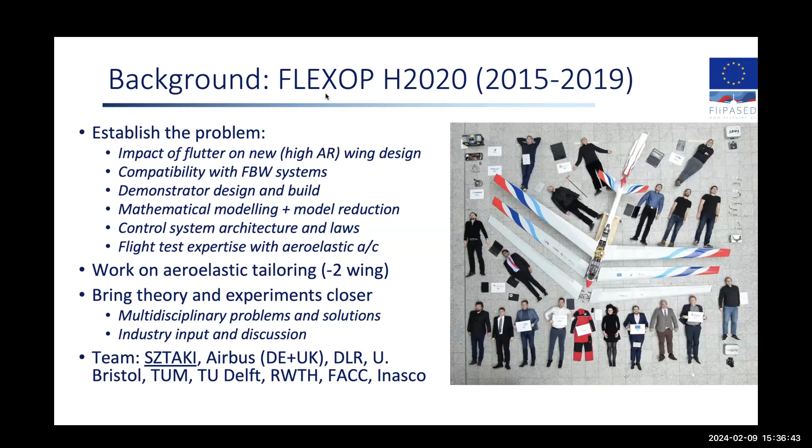So just a little background on our aircraft. We on purposely put lots of sensors on the aircraft. So what you see here is that in the wing, you have multiple inertial measurement units measuring both the acceleration and the angular rates inside the wing.

So to be able to reconstruct the flexible behavior of the wing, we have lots and lots of actuators to be able to control the motion of the wing.

And we developed our own flight control architecture to be able to react very fast, because we know that flutter is a kind of very fast dynamic phenomena. So you would not be able to allow space to have more and more delay in your loop.

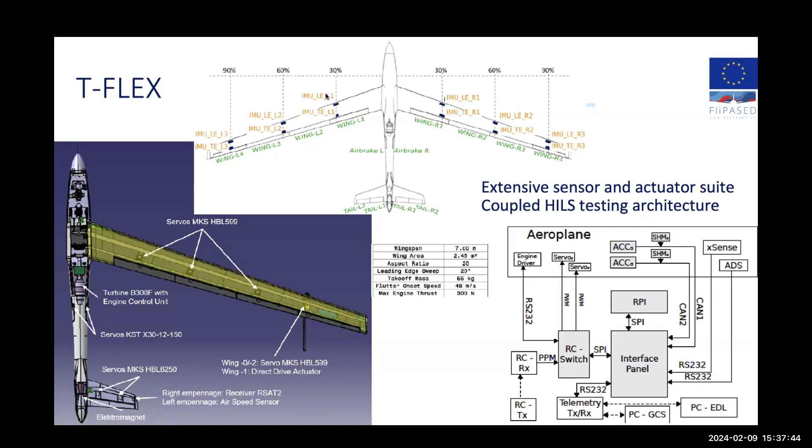And coupled with that, we also developed the hardware in the loop infrastructure, which came very handy during the time of COVID, so that we could test algorithms and flight control computer parts in our lab instead of going to Munich, where the aircraft was sitting.

So we were very lucky that we had a follow-up project from 2019, which was also led by me, and mostly the proposal was also done by me.

The basic idea was that we know flutter is a limiting phenomena if you have an aircraft, but what happens if you put controls into your multidisciplinary design optimization and open up some design freedom in your aircraft optimization space to account for active control technology, and you can, for example, delay flutter by a control law,

which can lead to 7 or 8% reduction in fuel consumption according to our initial calculations. So what we were saying in this follow-up project is, let's carry over the demonstrator, and we wanted to validate both the control technologies and the aeroservoelastic modeling framework.

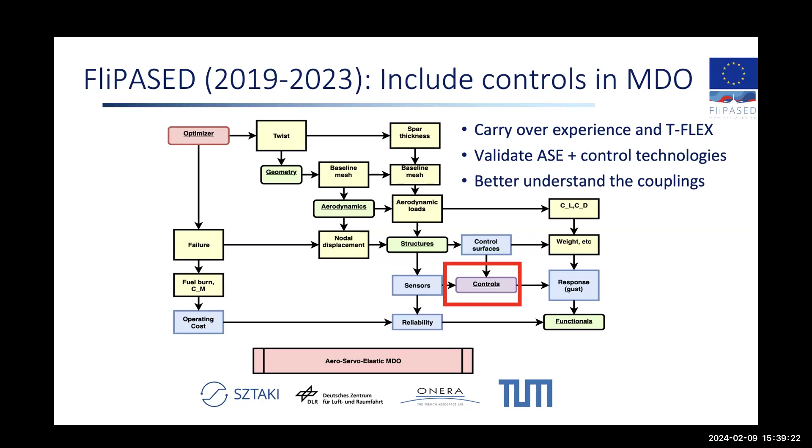And what we said is, let's better understand how control and aircraft design couples. So what are the main challenges if you have a flexible aircraft? You have multiple phenomena happening at different frequencies.

First you have the zero frequency, the trim. You have to optimize for trim to be able to get the best fuel consumption. Then you have the baseline flight control laws, which are kind of low frequency. Then you have different dynamic loads by gust and by turbulence. And then the highest frequency phenomena is flutter.

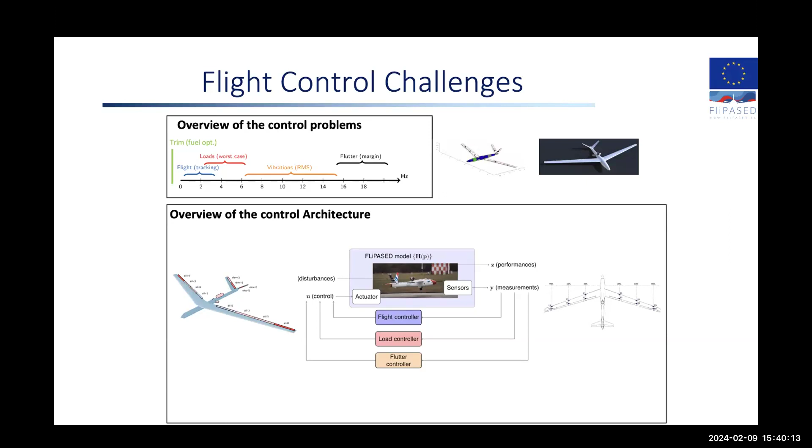So we have to do nested feedback loops. They would interact with each other. And you really have to develop a systematic framework, because if you design one feedback loop without taking care of the other, then you would have some troubles.

So we had lots and lots of things in the project, but I'm going to focus on the flutter control part, because that's the highest frequency, the most challenging thing.

What we were doing in the flutter control problem, we initially decided that we will have two kinds of competing designs, one of them by DLR, the other one by Sztaki. Both of them would be based on the high fidelity model developed by DLR. And then one approach, done by DLR, is a so-called H2 optimal blending.

So you would take all your sensors and try to blend them in a way that they are sensitive to the flutter mode. You generate one single output, which is representative of your mode, what you want to control and what is unstable in our setting. And then you would just design a very simple dynamic controller, so this blending is actually a static thing.

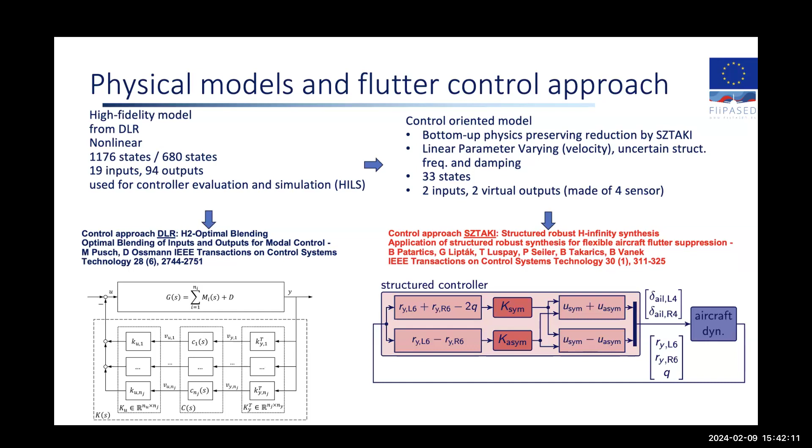The Sztaki approach, which we developed together with Pete, was based on a structured controller synthesis, which was kind of the need of industry, that they don't want to have a very large, very complex control gain or very complex dynamics. So we said let's restrict ourselves to have a very simple dynamics, but we want to do an H-infinity optimization to be able to optimize for, let's say, disturbance rejection or sensitivity.

So the first thing you have to deal with in these aeroservoelastic problems is you have a model coming from, let's say, another partner, DLR, where you have very, very high state order and no control design method, or not no, but all the control design methods would have a very hard time working on them.

So we developed first a model reduction technique or framework, in which one of the most important things was we wanted to retain the physical insight of our system. We developed the model reduction technique where you still retain the physical meaning of the states, and that can be done by a subsystem approach. So we individually reduce the aerodynamics and the structural dynamics, and then put them together afterwards to assemble a model which you can still analyze certain engineering phenomena.

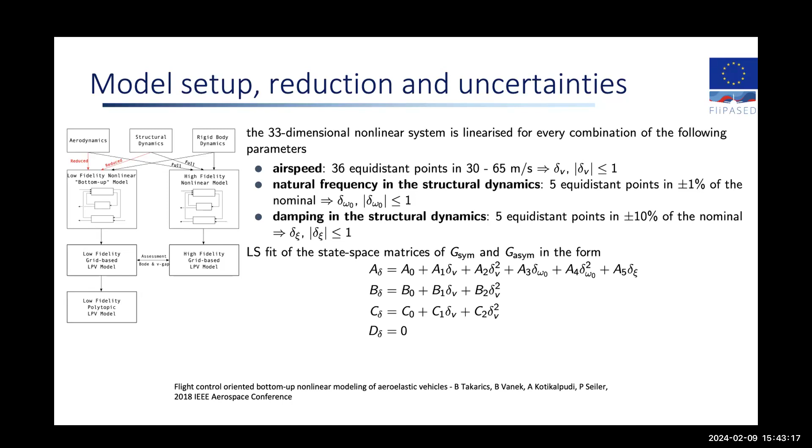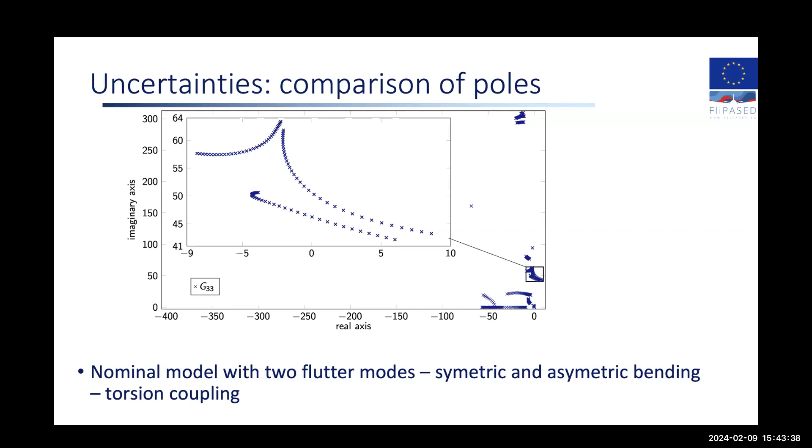After that, this physical approach also allows you to introduce uncertainties in your plant. So we said we don't want to have a design for just a nominal plant, but we wanted to represent physical uncertainties both in the modal frequencies and modal dampings of our aircraft dynamics. So with the subsystem approach, after reduction, we were able to introduce parametric uncertainty in the model. And since we wanted a simple control design, we decoupled the lateral and longitudinal dynamics to be able to have two flutter modes: one is symmetric flutter, the other one is asymmetric flutter.

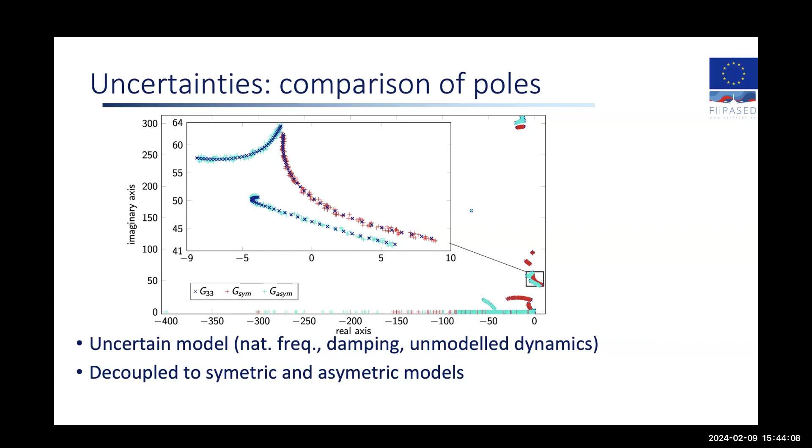Then we went to design a controller. It was natural from the beginning that we would use the outermost ailerons. There was no question that the wingtip actuators would have the highest control authority on the wing bending and torsion motion, but we had to come up with the best sensor selection.

As I said, DLR was doing a full all-sensor blending. We wanted to do something which is more explainable. So we said, let's pick certain sensors and then blend them manually and do a similar control design, like a SISO control design, but put some engineering thought into what is the best way of picking these sensors. Normally, the state of practice in aircraft industry for measuring vibration is to use accelerometers.

What is actually interesting is that accelerometers would be picking up wing bending motion, but our flutter is mostly torsion dominated. So we went with an unconventional selection: we wanted to have the torsional rate sensors in our control loop. For the symmetric motion, we blended the left and the right and subtracted the center body motion, and for the asymmetric, we just took the difference of the two.

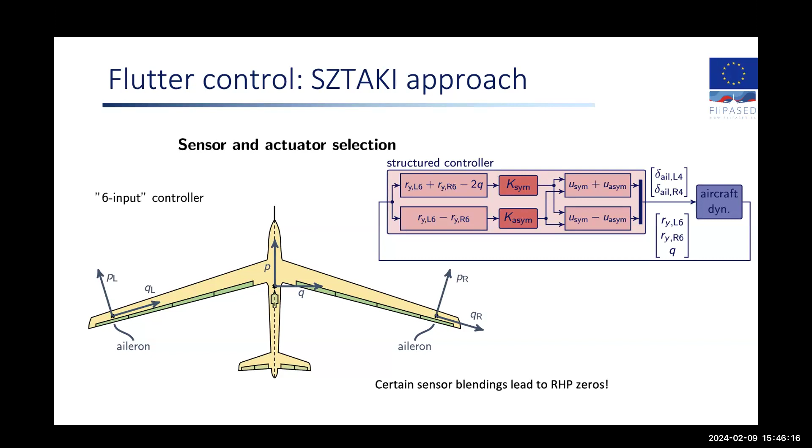But just to make sure that during flight test we have a backup solution which is maybe more robust, we also did a control design where we used additional sensors, not just the torsion, but the bending rate. That was just for our own sake, to make sure that if something doesn't work in flight test, we would have a fallback option.

So then, if you massage your system like I explained, you end up with a design model, which in this case is a SISO model. But you can see that there's some pretty nasty, unstable behavior at the flutter frequency, and there's lots of variation of the plant as you change speed from below flutter speed to over flutter speed.

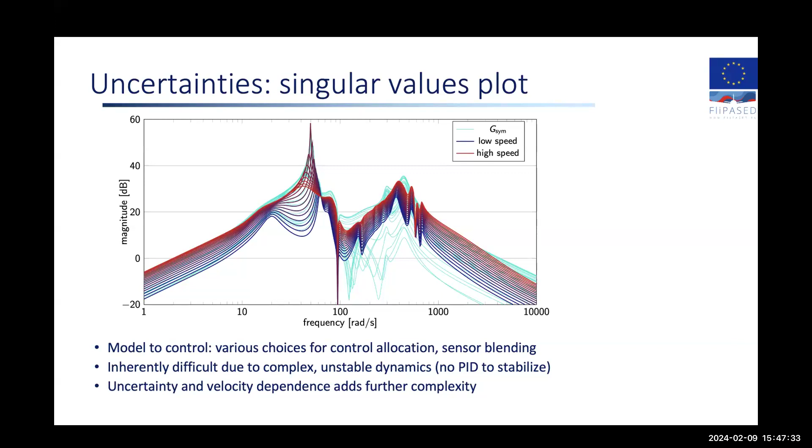We didn't prove it, but it was even kind of obvious that a PID controller would not be able to stabilize these plants. These are such complex dynamics that simple controllers would not be able to provide stability. And of course, we still had the uncertainty in these plants, so we wanted to design a controller which is robust for a parameter variation of damping and also for a range of velocities.

So, as we said, we picked our favorite control design methodology, H-infinity, but not like a full H-infinity solution. For the symmetric modes, we have a 4-states controller, and for the asymmetric, we have just a 2-states controller. That was kind of an iterative process to come up with these state numbers, the lowest possible with which we can have meaningful results.

And the control setup, like the weighted interconnection, looked like this. So we had only sensitivity minimization, and we penalize only the actuator input. We also had a prescribed filter to match the bandwidth of the actuator. So this is your only free parameter, and you prescribe the structure, and of course you have a delay in your loop.

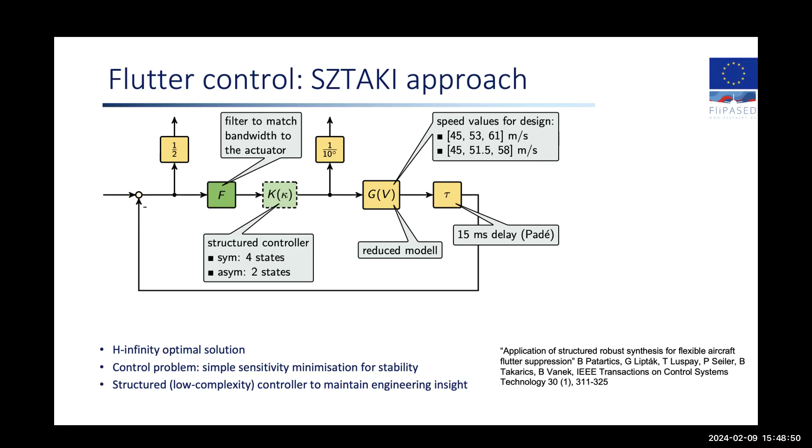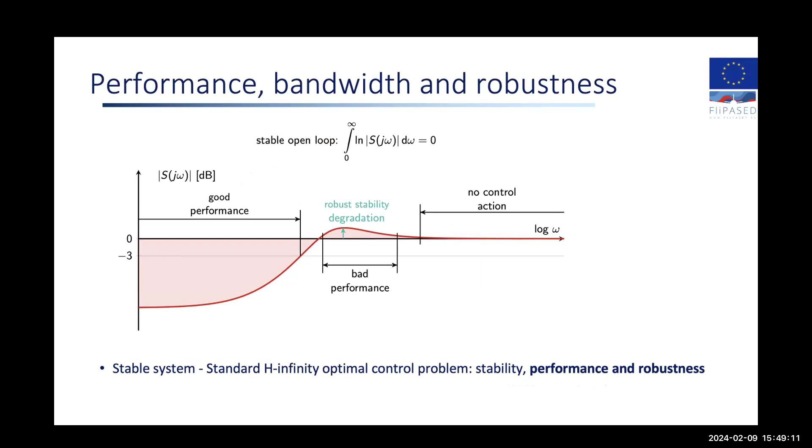What we wanted is a controller which stabilizes a range of velocities with one single controller. Of course, if you have a stable system, you could have performance, and it's kind of the easiest problem to have. You can have robustness as well. You have a certain frequency range where you have degradation, and then at high frequencies you usually have no control action.

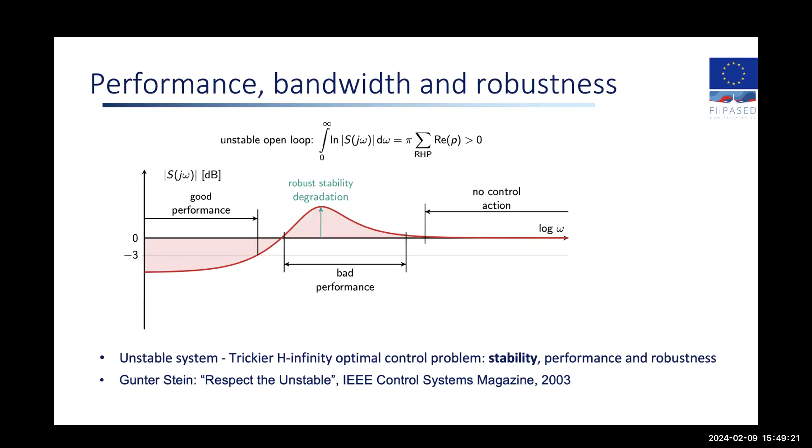Of course, if you have an unstable system, then you have even more difficulties. And if you have right half plane zeros as well, then you might not be able to do anything with performance—you just want stability. So we set up our problem as a sensitivity minimization, where we didn't want to achieve any kind of performance, just to make sure the plant is stable, because in certain combinations we had right half plane zeros in our design plant.

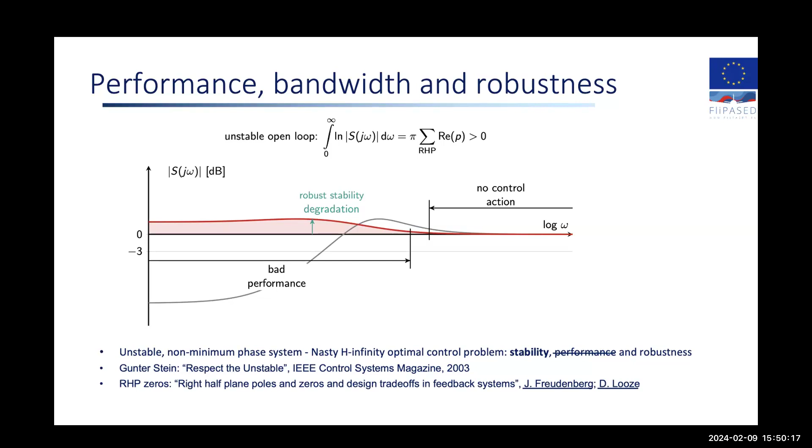It was kind of a long process to find the best trade-off between sensor selection and achievable performance. For example, the accelerometers would not give you good results because they had a direct feed-through, and that would lead to further complications in the control design.

So then we had the plant from DLR, we reduced it, we designed a controller for it, and then we started analyzing, first of course in simulation—how the whole trajectories look like.

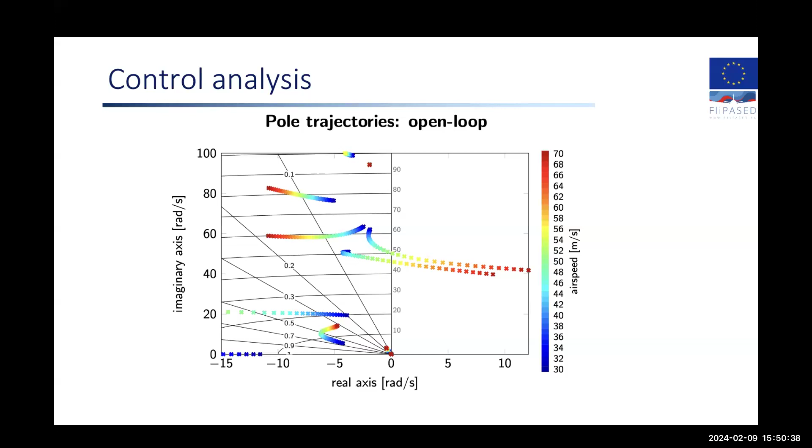This is like what you see: the two flutter modes, which become unstable around 50 meters per second. And then, because you might also have some unstable rigid body dynamics, like a slightly unstable spiral mode, first you have to close the baseline controller to stabilize your aircraft in rigid body flight. So we analyzed, and the flutter modes did not really change with the baseline controller—we designed the baseline not to interact with these high frequency modes.

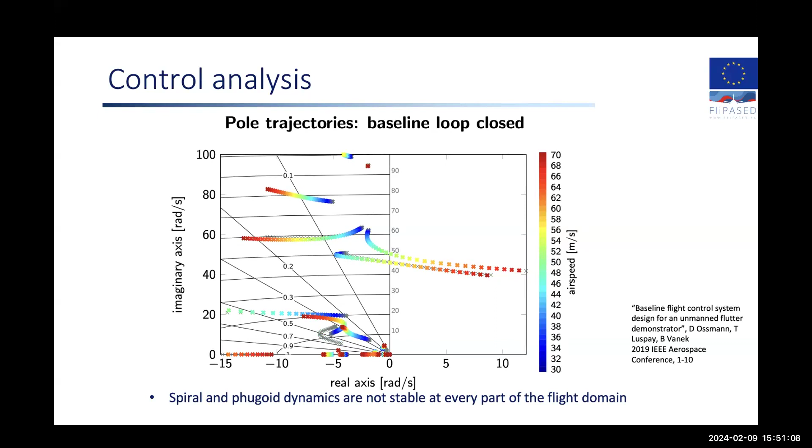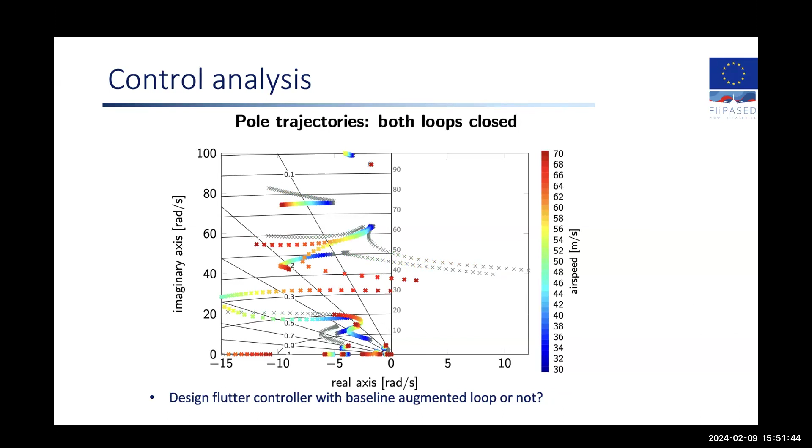So that's good. Then we applied the flutter controller, and what you see is that those previously unstable modes are delayed significantly. But of course, usually you want to design the fast feedback loop first and then the slower feedback loop. So in our case it was also a trade-off: do you want to design the baseline controller or the flutter controller first? We ended up designing them separately and then looking at them together.

The final evaluation was: what are the margins of these controllers? As I said, we had different designs taking into account a velocity range, so you have multiple plants across a range of velocities, and you design one single LTI controller for that family of plants. Then we analyzed the disk margins—the gain and phase margins—of these controllers.

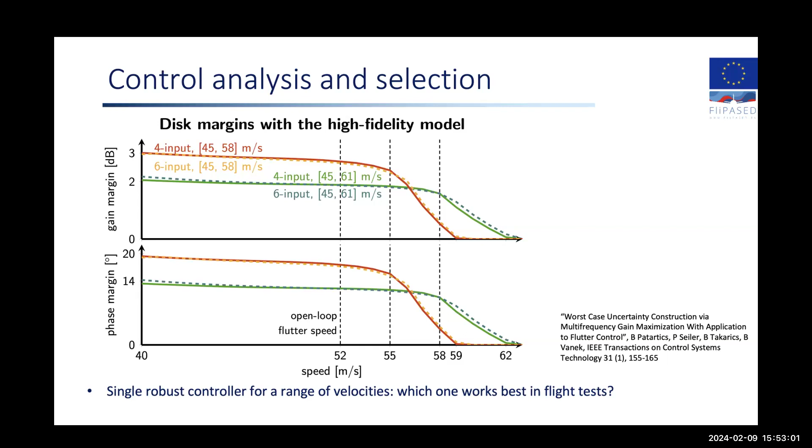We found that the 4-input and the 6-input controllers did not really have significant differences in terms of margins. But of course, if you design your controller for a larger range of velocities, you lose robustness even in the low velocity domain. So what we ended up flying was the more robust version, because we wanted to make sure we would not crash. This is kind of the setup.

We built our whole control design and analysis framework, and in parallel we started flight testing our aircraft. There were some logistical complications—for example, the EASA rules in Europe changed regarding where you can fly such a large 7-meter wingspan, 65-kilogram aircraft. So we moved from DLR Munich to DLR Cochstedt, which is in the middle of nowhere, where you cannot hit anyone if you have a problem.

In 2022 we started checking the baseline controller. We started injecting maneuvers so that you would do the rigid body and also the flexible identification of your plant, and started preparing for flutter control.

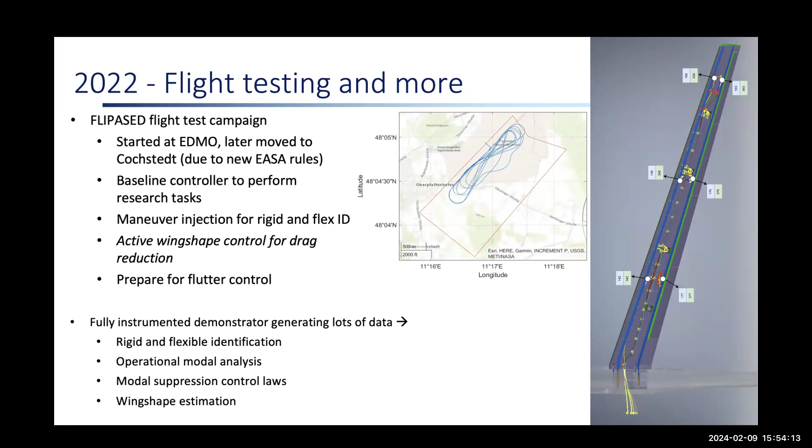We have a fully instrumented aircraft, so it's generating lots and lots of data. You have many opportunities to work with that data. It was kind of funny to also develop all the post-processing tools to be able to very quickly assess the flight and say, okay, is it safe to get the next flight test data point or not? What was also a very big complication during the project is...

we realized that this flutter frequency, which is almost 9 hertz, is something no off-the-shelf actuators are able to handle. So we developed our own actuator to be able to control the outermost flap. You could see that this is not your average servo actuator which sticks into your wing, but it's kind of bulky, big, and heavy.

Because of that, we actually ran a parameter sweep to find the best position to put this actuator on the wing. What you see here is that in these different locations, the flutter frequency changes from 8 to 5 hertz. If you have the wingtip mounted actuator, then you have low frequency, and here you have very high frequency.

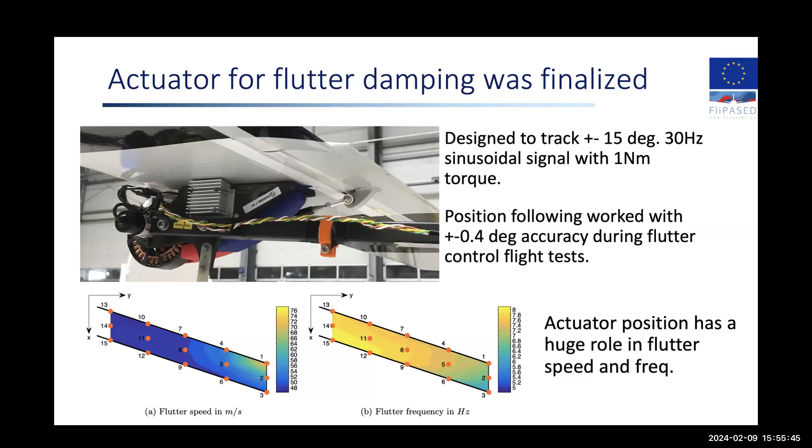The flutter speed also changes from 48 to 76. Our aim was to have the lowest possible flutter speed, but also the lowest possible frequency, because then you would not be required to develop such a crazy actuator. By crazy actuator, I mean you could see it on the wing, and in a static test stand, if you start actuating just the actuator, it actually starts shaking the wing itself.

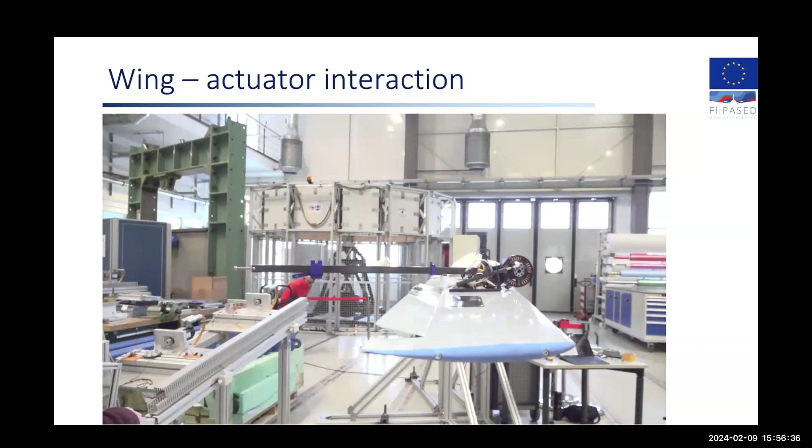What you also see here is we put in a safety mechanism. This is a rod, we call it a flutter tuning rod, in which you have a little mass. It's a safety feature that if you release it, a mass goes next to the wing, and then the flutter speed is increased significantly. So it's a safety net that if we trigger it, then we have very different torsional dynamics over the wing. But you see there's quite a big motion just only by actuating the direct drive.

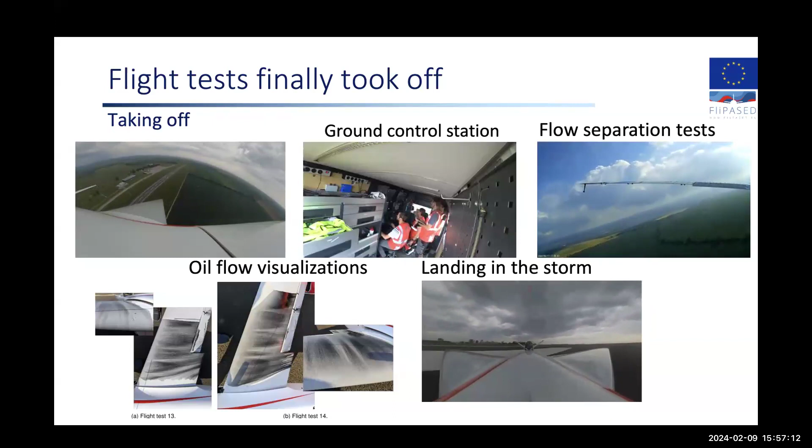As I said, in 2022 we started to fly the aircraft. We developed this ground control infrastructure, and we were also trying to model the flow around the aircraft, to see how good the predictions were, or how good low fidelity CFD tools are.

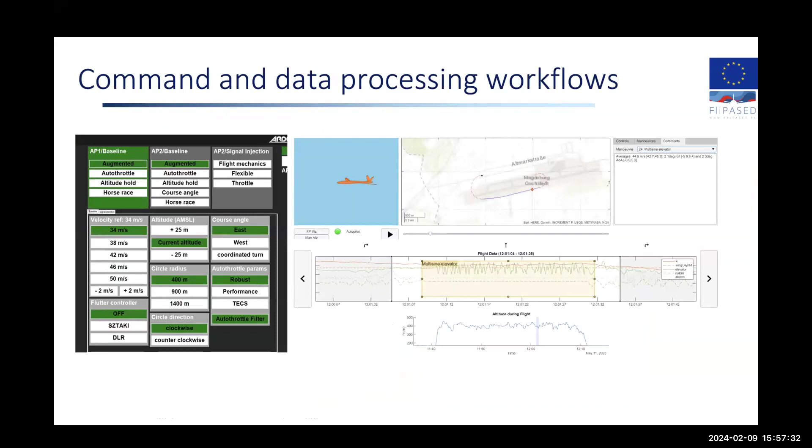We were also doing some oil film visualization to check for flow separation or something like that. In parallel with that, we developed the monitoring framework and the flight test infrastructure to be able to inject certain maneuvers and evaluate the results in real time.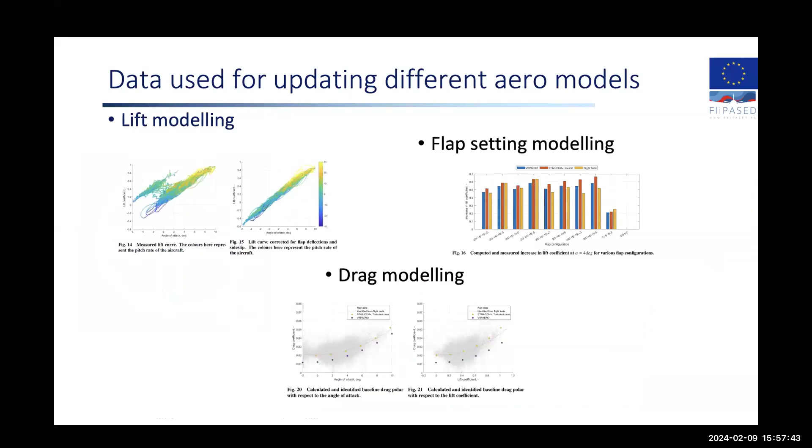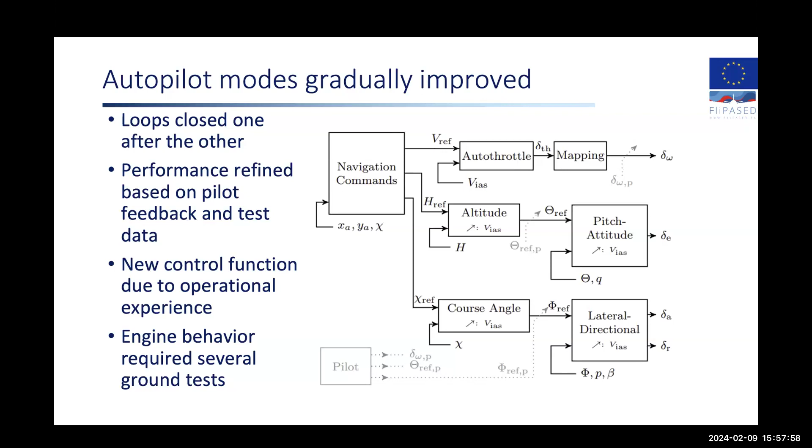With all that data, we started updating our models—lift, flap, and drag models. As I said, we were working first on the baseline controller, which is very important for flutter because you don't want to overshoot your speed, as just by accident you could end up in a dangerous zone. We have pretty good results even initially on the rigid body motion.

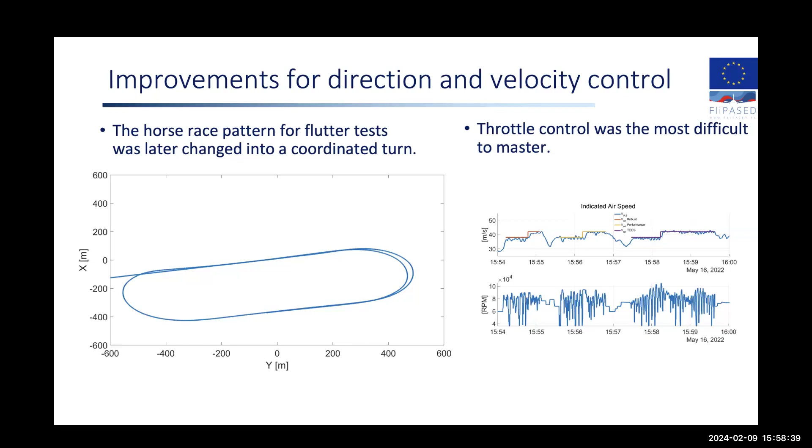What was very difficult was to be able to control the velocity, especially because we have a jet engine which has a very large lag and not too good of an interface with it. So we ended up designing many different approaches and testing them. You see 3 different control designs for the velocity tracking, and we were evaluating and comparing them to see which one would be working the best.

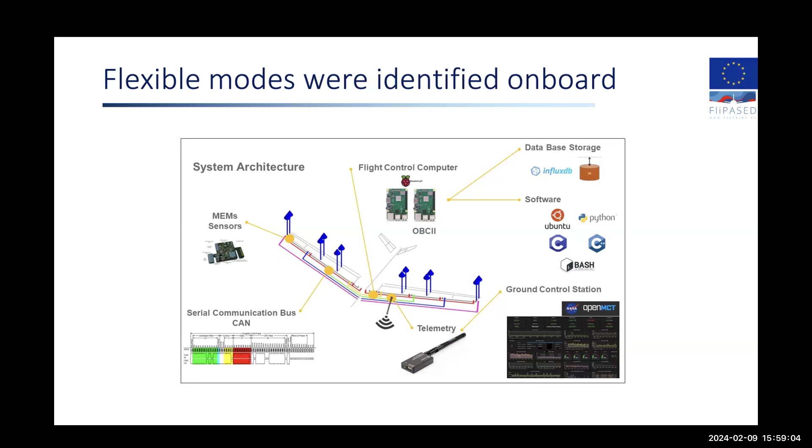In parallel with that, we were not just using the data after we finished the flight, but we were also running so-called operational modal analysis. We have all these sensors inside the wing, and with those sensors we were able to characterize the modal properties of our aircraft. It's actually something which is done in large aircraft, but we were able to squeeze it down to a Raspberry Pi, which was a big feature on its own.

What you see here is during the flight we are able to track the different modes. So it's kind of online system identification. We are able to track the frequencies and also the damping of these modes.

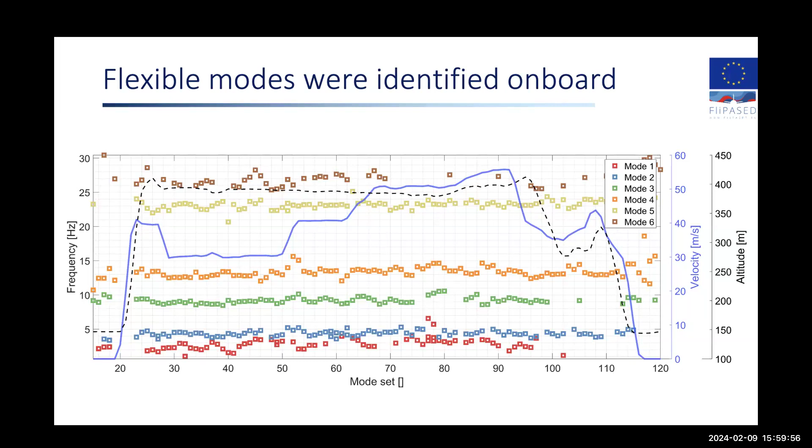And of course, if you are getting closer to flutter, then you would see certain frequencies changing and the damping rapidly dropping. So it was kind of a safety feature—we conduct one flight, and if we still have flight time to go to the next test point, we would take a look at this data and see whether we have the confidence or not. So what comes out of this are these mode shapes and their corresponding frequencies.

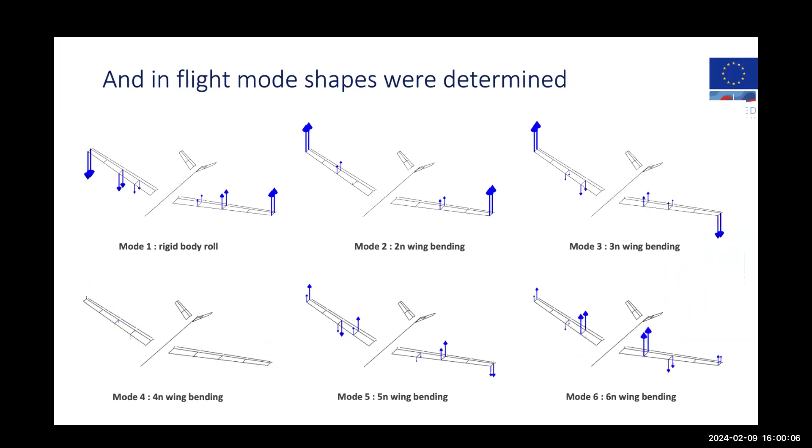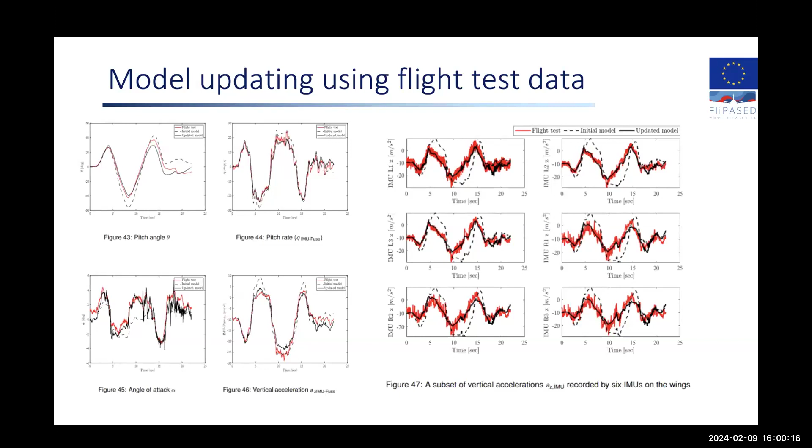As I said, we were doing system identification to get better models, based on which we can synthesize better controllers. We were very happy with all the progress, but then on the 30th of August 2022, we had a flight test.

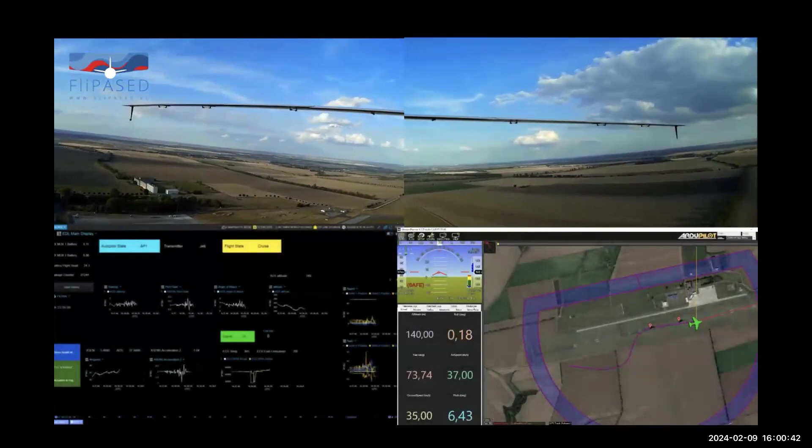It did not go as planned, and I still have goosebumps now if I think about this. You will see what I mean. We had a little bit of a mishap, I would call it. You see the aircraft doing its normal maneuvers, and suddenly the parachute opens up.

It's a safety parachute. What actually happened is both telemetry and RC links were cut because of a certain geometry, and this is the bad part, we ended up losing our demonstrator aircraft, which we had built since 2015.

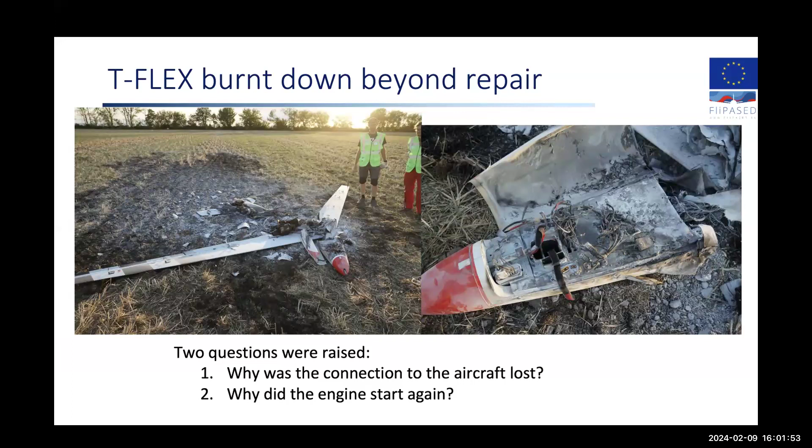So the big questions were: why was the connection to the aircraft lost, and the next thing, what caused the fire, why did the engine start again? It was discovered that it's very bad if the antenna points towards the pilots, because that's the blind spot of the antenna characteristics. We went back and analyzed how we should redesign the RC system to avoid this in the future.

But the bigger problem was that in our safety analysis, we said that once the parachute opens, it's the end of the investigation, so if the parachute is open, we cannot do anything. But it turned out we forgot that when it was hanging on the parachute, the reception to the RC system actually reconnected. And because the RC system was still in engine-on mode, it restarted the engine. So the lesson is: never stop your safety investigation when the aircraft is still in the air.

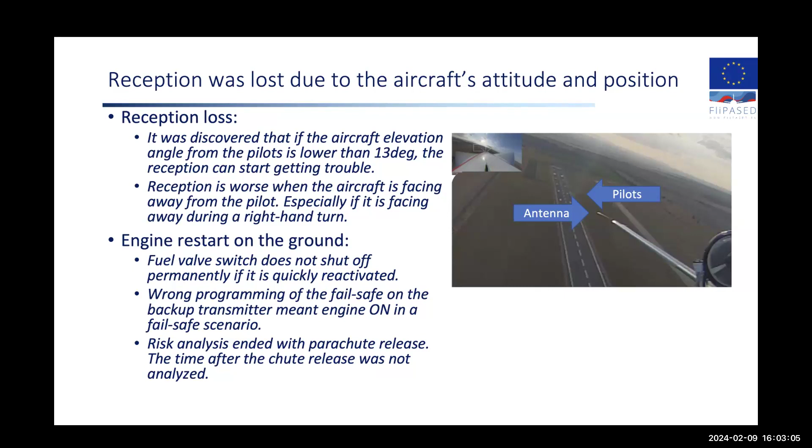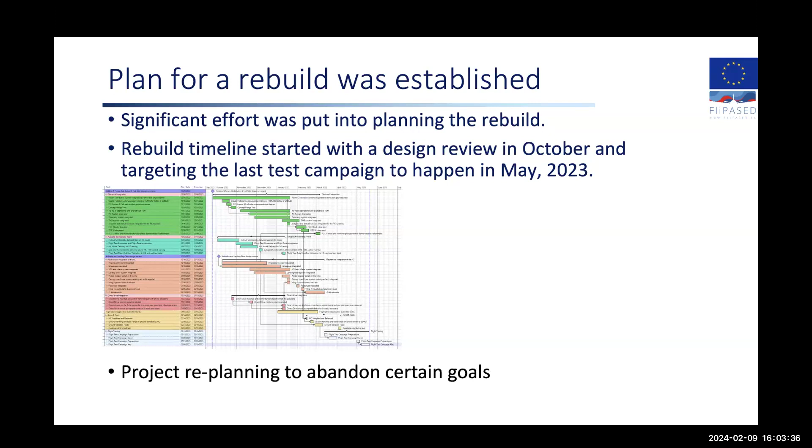But we were very eager to still conduct flight tests. This happened on the 30th of August 2022, and the project finish date was June 2023. So we made the decision to rebuild the aircraft, and put together a very ambitious test campaign to still conduct the flight tests. Of course, we had to abandon certain goals of the original project.

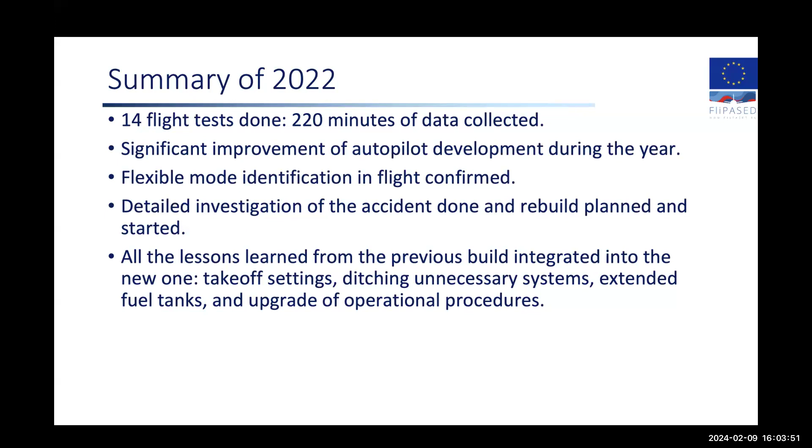But in 2022, we conducted 14 flight tests, collected lots of interesting data, improved our modeling and control framework, and learned lessons the hard way. My colleague from TU Munich called 2023 the rush for success.

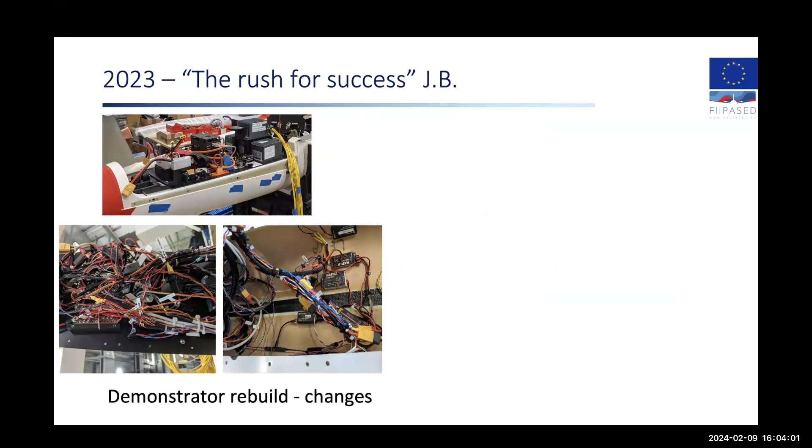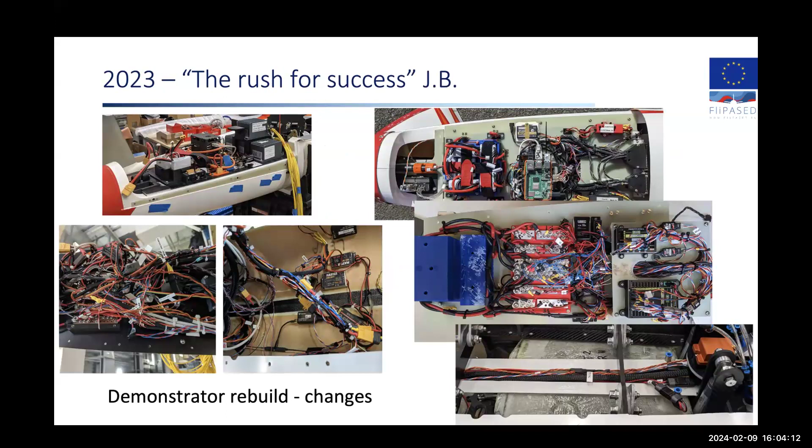What we did is we actually rebuilt the demonstrator. The original build was a little haystack, so we now had the opportunity to rebuild it in a much better arrangement. In April, we went out and conducted the ground vibration test of the aircraft. The crash was end of August, and in seven months we rebuilt the aircraft and went on to conduct the vibration test, which confirmed the models and updated them slightly.

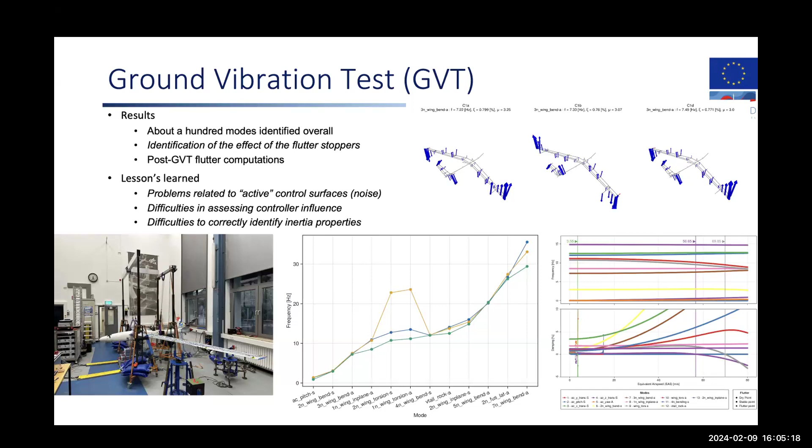We have an updated flutter speed of 56 meters per second, and we also analyzed the behavior of the flutter stoppers, which can significantly change the behavior of the torsional mode, so it's actually effective in delaying flutter. What was also important is we were testing an active control system in a ground vibration test environment, and we learned a lot about the problems that arise when the system is not passive but has active control surfaces and control laws, making GVT not so easy anymore.

As I said, in April we conducted the first flight test of the rebuilt demonstrator. We were quite happy with how it flew, and relieved that maybe we could save the project. But all the interesting things were still to come. This was just a ceremony to sign the aircraft after the maiden flight.

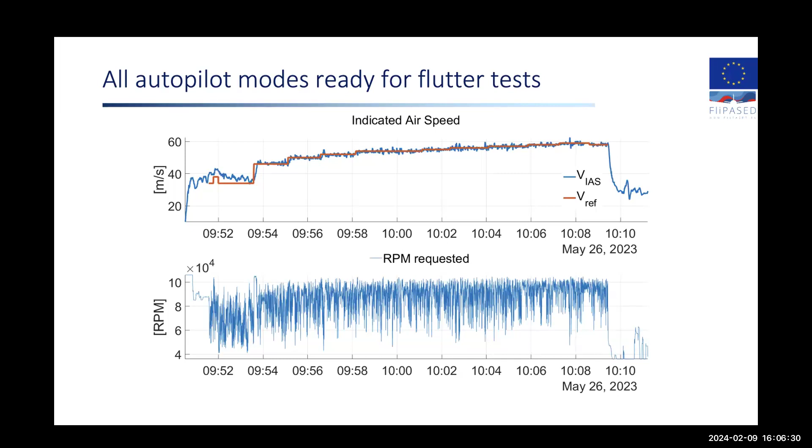We had two concentrated flight test sessions, with all team members in Cochstedt, everyone working around the clock to get as much flight testing done as possible. Everything was ready after a few flights to be able to go up to the flutter speed. As I said, velocity tracking was one of the most important things, so what we were doing was staying below flutter speed, which is the safe region.

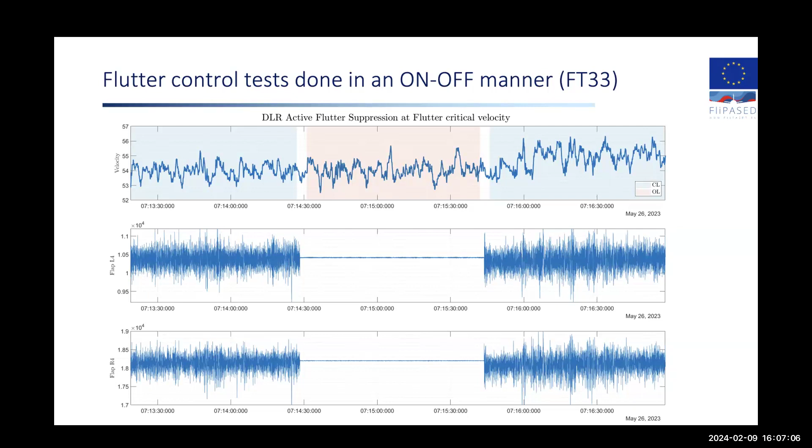If you look at the time domain data, this is an early flight below flutter speed. You would not be able to say anything, is it working or not? Definitely there's different spectral characteristics, but who knows which is better or not.

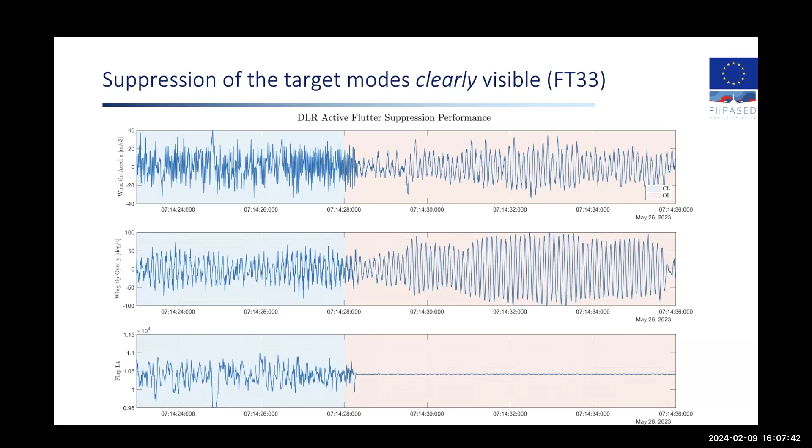So when you go into the frequency domain and analyze the frequency content, without the control law you definitely see a sharp peak, which is kind of resonance. With the control law, these resonances are significantly damped. So we were confident that with all these sensors, with the DLR controller which takes credit of all the wing IMUs, we were still able to do something meaningful.

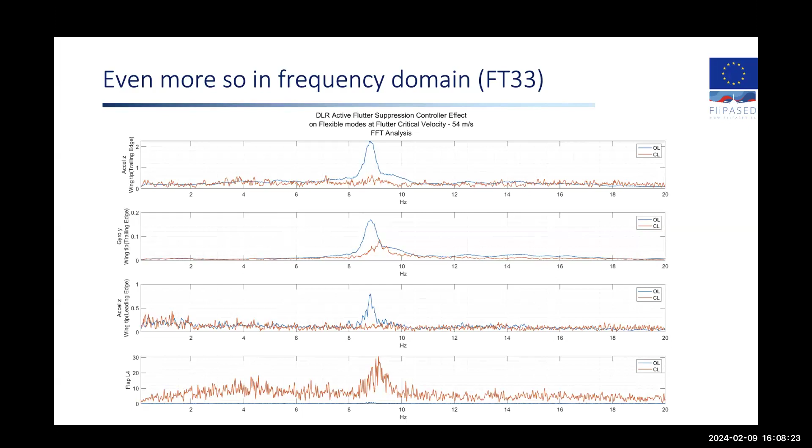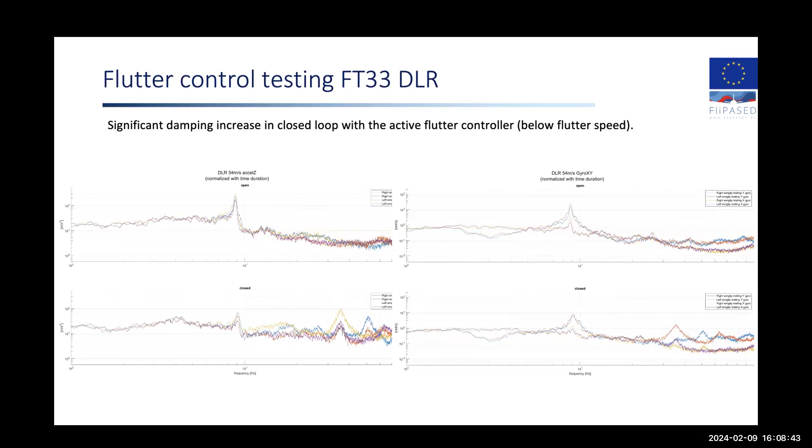What you see in this chart is also similar. The open loop with a large peak on the left and right wing, and then the closed loop. Both on the accelerometers and the gyroscopes, you see damping of these modes.

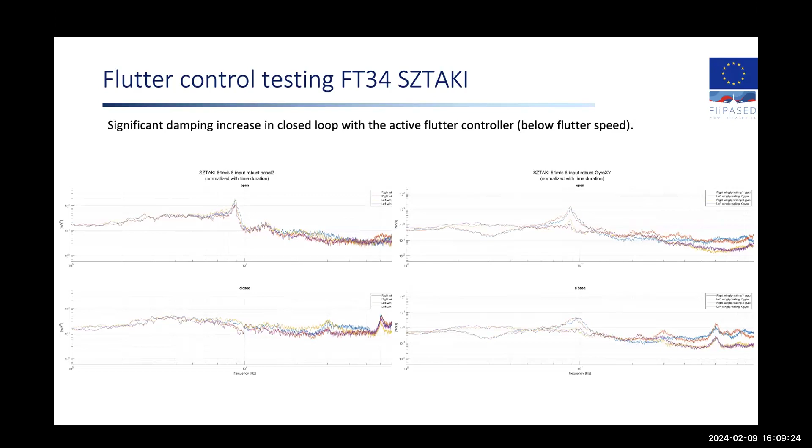The other controller which flew, flight 34, is the SZTAKI controller. Here you can also see the accelerometer response in frequency and the gyroscope response in frequency. Just remember that this controller only uses the gyroscopes, but still in the accelerometers you can see this very big damping of that resonance mode, the flutter mode. So it was reassuring for us that everything is working as expected.

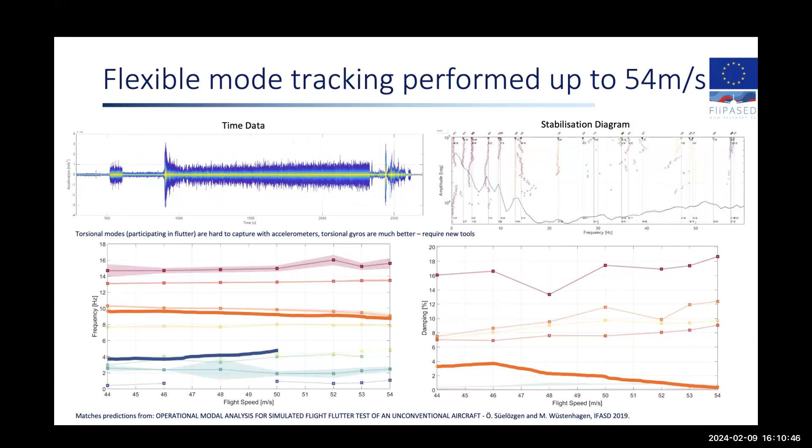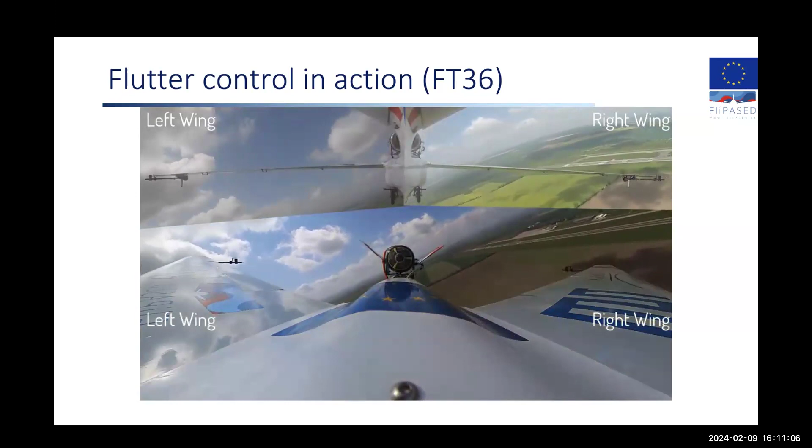So we said, okay, let's go beyond flutter speed, because it looked like the controller is working. What you see here is flight 36. You see the aircraft flying in large circles with constant velocity. This is the velocity profile of the flight, and what you see is there's nothing happening, which is good.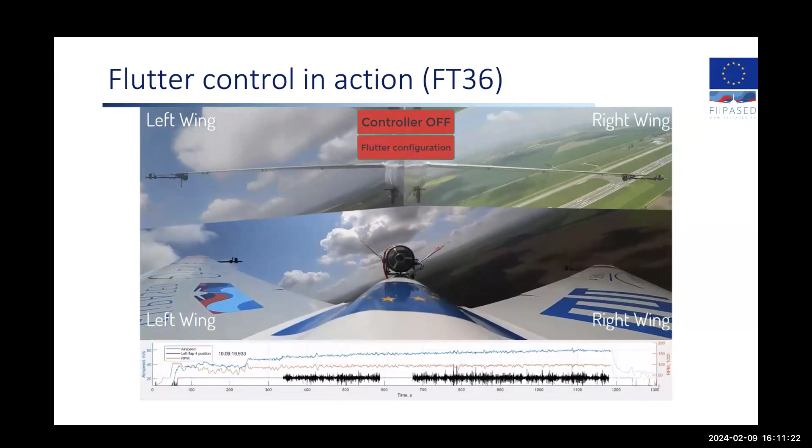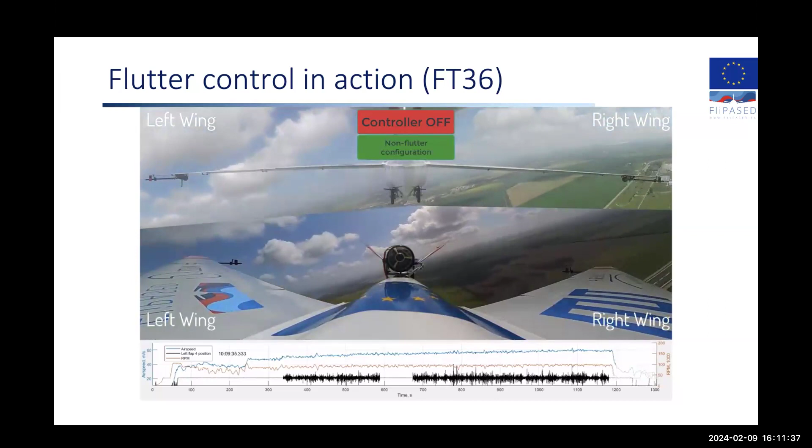Then we turned the controller off, and you could see this sudden vibration, which is kind of close to flutter, and then we actually turned the flutter stopper on, so the vibration kind of fades away.

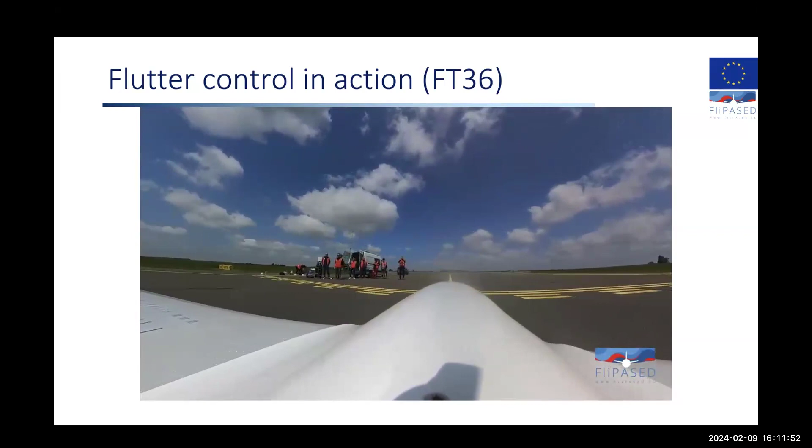We were happy with the flight and the results, but there's always a little devil on your shoulder saying, was that really flutter? So we said, okay, we conducted all the flight tests we wanted to do, so let's have one last flight to go all out. And that's flight 37.

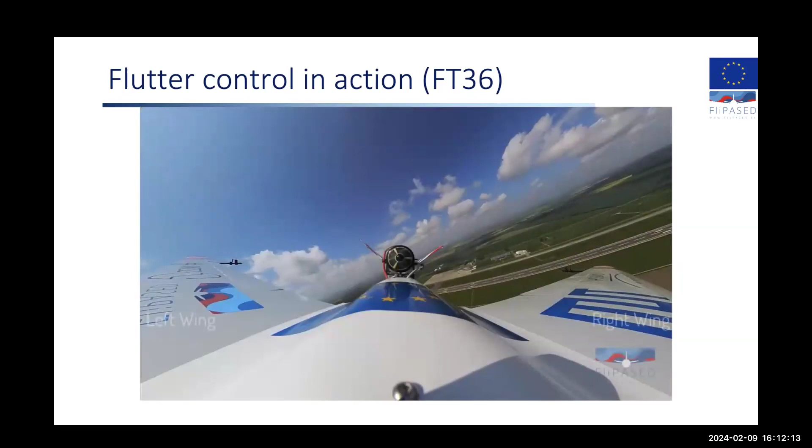So what you see... oh okay, sorry. First just the analysis of the results. So we conducted flights at 59 and 57 meters per second. Both of them are beyond the open loop flutter speed.

And you see that these resonance peaks, which were visible in the open loop, are not that pronounced in the closed loop. On the gyroscope, you start seeing some of these resonances, but they are not that sharp, and they are still clearly stable.

But what is a side effect? There's never a free lunch. You start seeing things in the higher frequency region. And this is something we are still analyzing, because the ground vibration test went all the way up to 50 hertz, but here we are seeing things at around 60 hertz, which is beyond the GVT frequency.

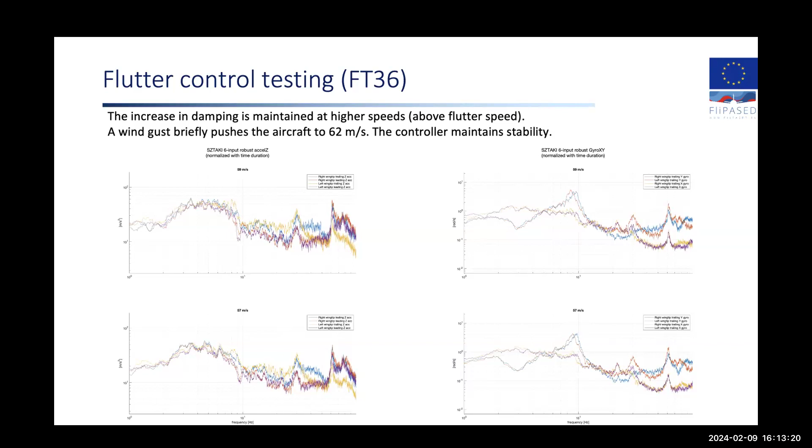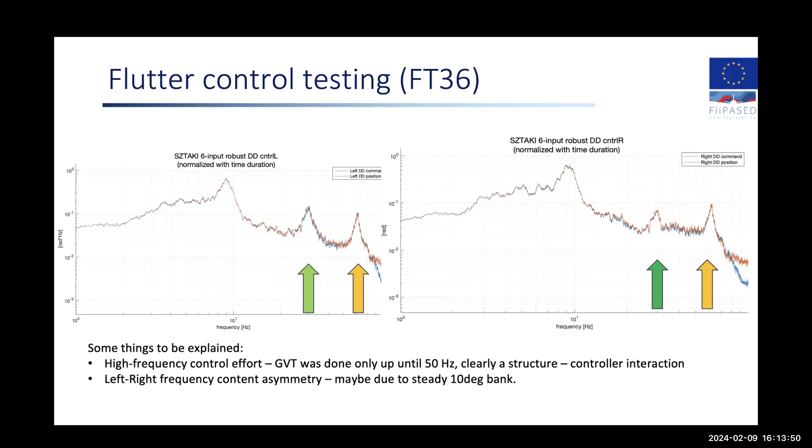So we don't know yet why those things are happening. It's just the explanation that we have a very sharp roll-off of our controller, so the controller should not be acting in this frequency range, but still we see actuator commands in that region. So it means that probably the plant has some high gain, that in the feedback loop we still see activity in that region. But we also confirmed...

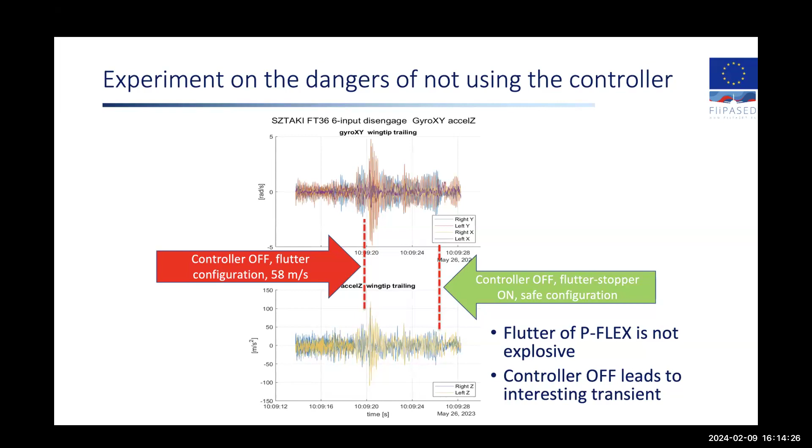...that if we turn off the controller, then we see this sudden increase in amplitude, which is saying that in open loop we were beyond the flutter speed. And what you see here also is when we release this flutter stopper, suddenly the vibrations were shrinking, and we were no longer in a slowly growing part of the gyroscope data.

Just bear with me for a moment.

So at this time, we were 1,000 meters away from the aircraft in our ground control station, and you could see that this is something that is not really good, but nothing crazy with the aircraft itself up until this point. From a ground control station, we were still not able to see that, like, okay, something actually broke off of the aircraft.

So we were still accelerating, and we were very, very sad, like, we were looking at the NASA and Lockheed Martin kind of experiments where the aircraft disintegrated. The aircraft was still flying, and we were like, oh shit, the whole project was for nothing.

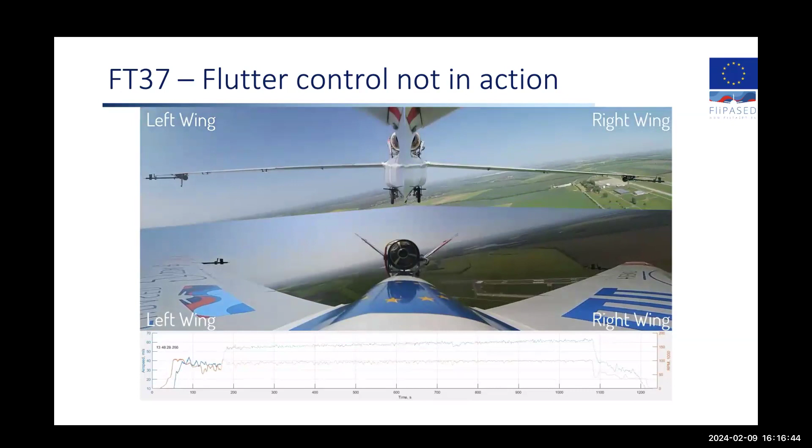And yeah, as we accelerated even more, even the other rod started to break off, and then, with the binoculars, I was actually able to see that there's something hanging on the wingtip of the aircraft. So then I was like, okay guys, maybe we have achieved what we wanted. So we were relieved, and we were very happy that we actually showed that we have flutter, and we also showed that with the active controller, we were able to dampen the oscillations and stabilize the plant.

So in 2023, we performed, after this terrible accident, 14 flights with 380 minutes of data, did the ground vibration test. We did all the analysis of the predictions versus the flight test, and they were matching quite well. And we were able to flight test 2 different controllers, and both the DLR controller and the Sztaki controller worked quite well. Of course, there are still these unexplained behaviors.

And even more interestingly, it's really a control structure coupling, in a sense that these 2 modes in the DLR controller were apart, and in the Sztaki controller, they were at the same frequency. So probably the structure of the controller and the feedback loops were different in the two. That left and the right wing had different frequencies with one of them, and similar frequencies with the other one.

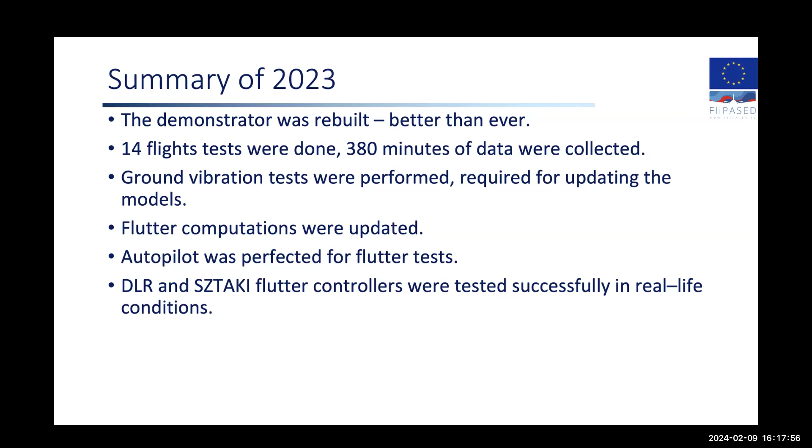So what we did in the project, at the end of the day, we developed avionics, both actuator sensors for flutter control. We validated a lot of the tools to be able to model, control, and analyze aeroservoelastic phenomena. We gathered 600 minutes of flight test data. We successfully demonstrated active flutter suppression in a conventional configuration aircraft in real-life conditions.

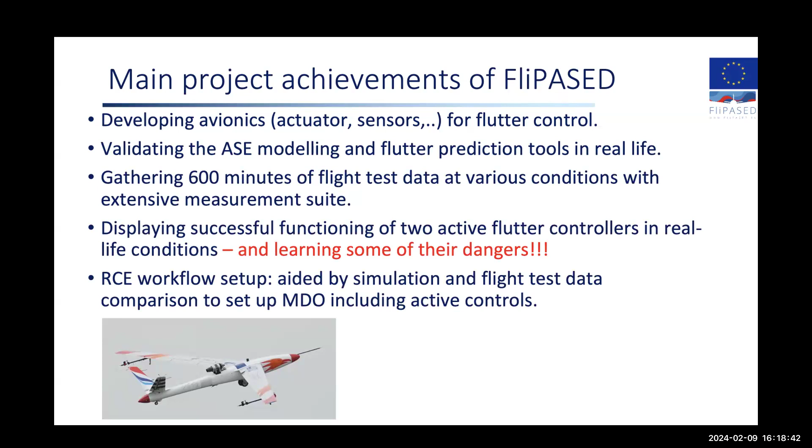And on top of that, we were also feeding all that information back to how we should do aircraft conceptual design with controllers in mind. And what I just want to highlight is that all the flight test data we collected is available online, open source. There's a lot of opportunities, I think, to look at that data and do system identification or analysis. And I'm very happy that I'm here and able to report about all this success.

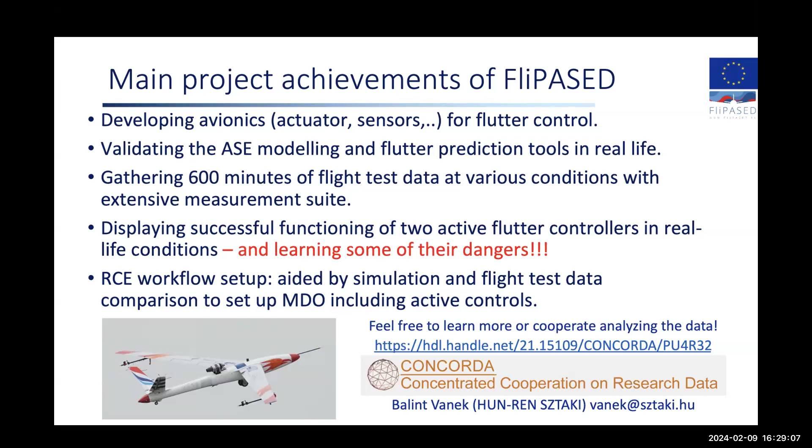So one other thing I was thinking... Hi, Chris Vermillion, by the way. Great talk, I like it. Thank you very much. Main stuff, you know?

I'd like to see field testing results. I have great respect for people who do this. On the ground, two pilots. Were they just commanding waypoints or were they commanding anchor points or what?

So what we did, initially we wanted to fly a pattern, accelerate, stay in the flutter domain, and then decelerate. But because of this operational modal analysis, you need at least a 30-second window to be able to capture the modal data. So what we ended up doing is we have a 900-meter radius circle, and the controller was actually commanding constant velocity, constant altitude, and constant bank angle.

So constant bank angle, yes, I did notice the ailerons were not. The only thing is that if there's wind, we didn't want to have a perfect circle, but we wanted maybe a helical pattern if there's a little wind.